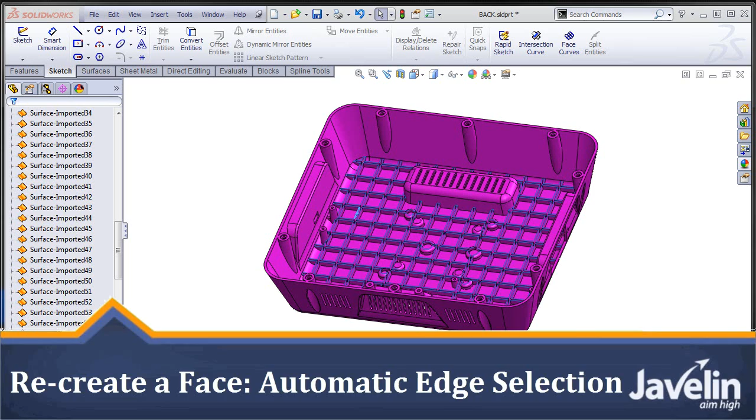This is Alin from Javelin with the third video from the series presenting importing bodies, troubleshooting them, and fixing the errors. In this case, if you remember in the previous video, we manually selected all the open edges, all the blue ones, converted them to sketch geometry and created a planar surface that would fill all the gaps between the surface bodies. What if I would have a magic button that would allow me to select all these edges automatically?

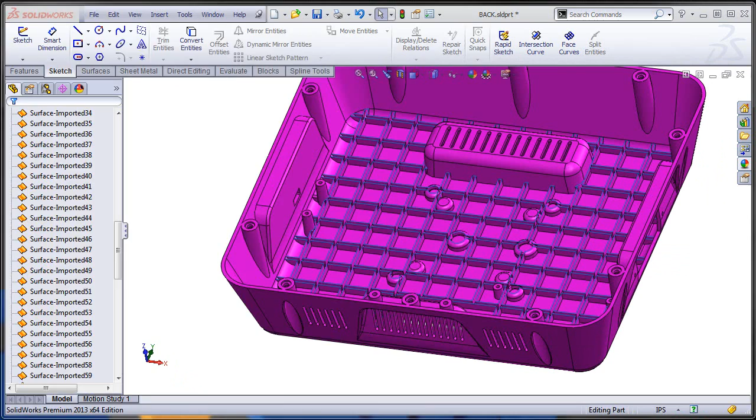Fortunately, my colleague Adam Bridgman created such a macro for me, and on our blog he actually wrote a nice article about the logic behind selecting those open edges. So let's try to create a little macro. I'm just going to go under the Tools menu, Macro, and New. Let's say it's gonna be macro 1, and I'm just gonna replace all this information with the text that he gave me, and let's run it.

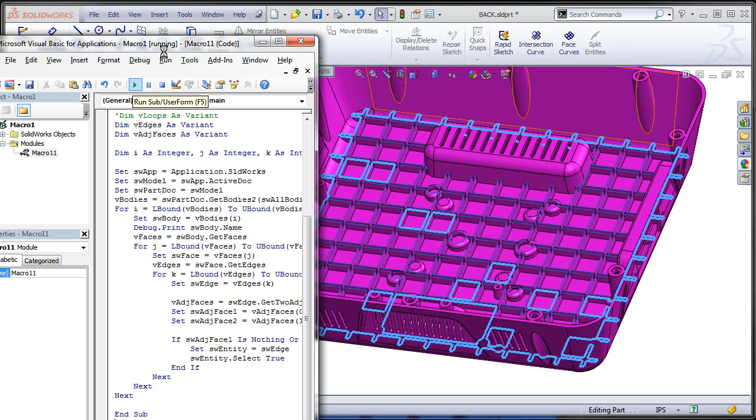So I'm just gonna go Run, and as you can see, this macro selects all the open edges, all the blue edges. It takes a bit of time because it has to evaluate all the edges inside the part and find the ones that have only one face attached to them instead of having two.

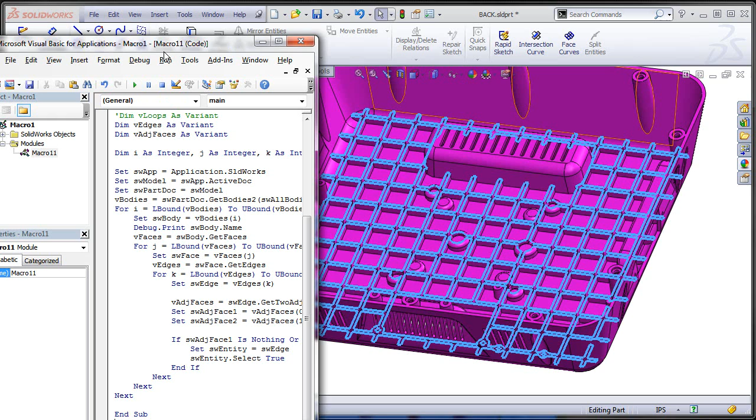So notice another thing, I haven't yet opened a sketch, and I don't intend to open a sketch. What I'm gonna do instead, I'm just gonna hope that all these edges are planar, so I can run the planar surface command directly with these edges pre-selected. As an alternative, I could have started the planar surface directly and run the macro from inside the planar surface.

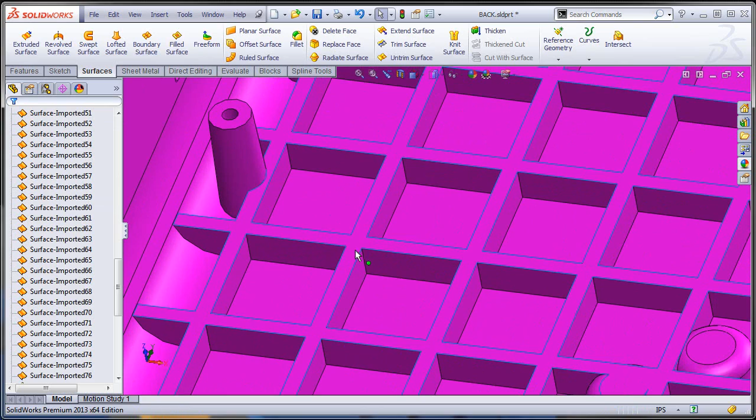So now I'm just gonna click OK. Notice my pre-selection, it's already listed inside the planar surface property manager. Now I hope SolidWorks is going to be able to find a completely enclosed area, and it did. So as you can see, the planar surface I just created worked nice. So now it's again a matter of knitting all these surfaces together.

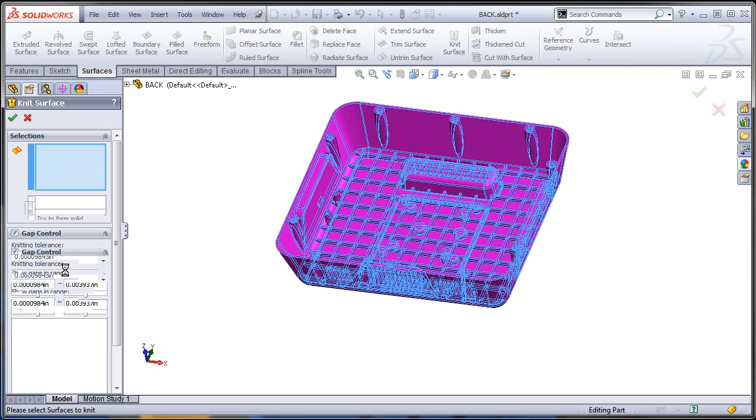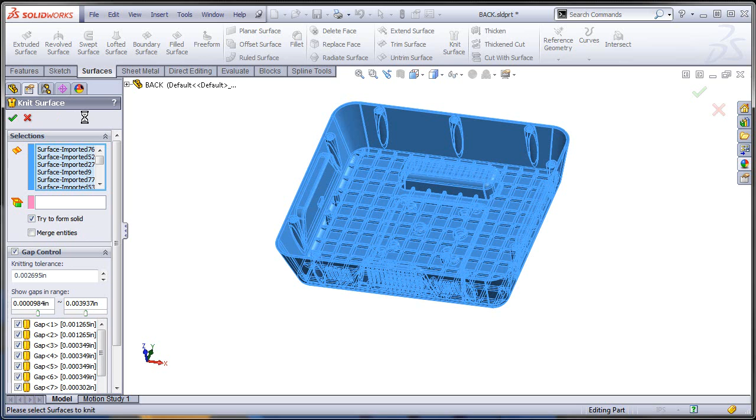So I'm going to press again Ctrl A to select all the surface bodies that this command is looking for. Once they are selected, if SolidWorks finds that they form a solid, they actually enclose a complete volume, I'm just gonna turn on the option to try to form a solid. Notice that automatically SolidWorks closes all the little gaps between them. So if I click OK, I should have now a solid. And as you can see, I have a solid body.